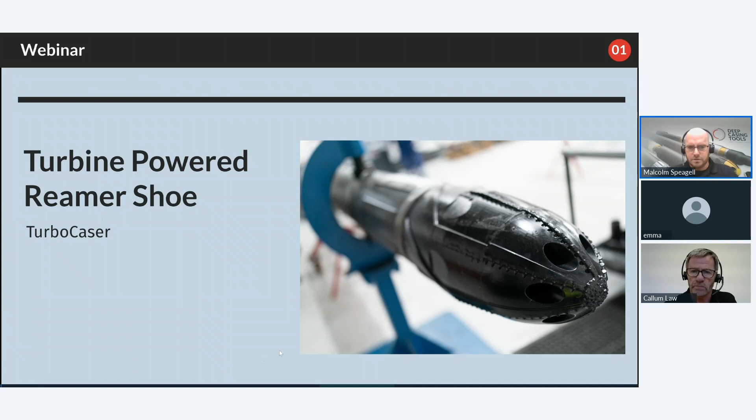Welcome to the webinar concerning the TurboCaser technology from Deep Casing Tools. We have two types of turbine reamer here: the Turbo Runner, which is a final string non-drillable reamer shoe, and the TurboCaser, which is the subject of today's webinar.

As you can see from the drawing on screen, it's very similar to a conventional piece of casing shoe equipment from the outside, but it has a special reamer shoe on the end, a high-speed, low-torque reamer, purely hydraulically activated by pumping fluid through while running into the hole. This technology is used to remove any obstructions that might be in the annulus while you're running your casing.

The TurboCaser, as mentioned, you can drill through once you've got it into position. Starting from right to left in this picture, we have the casing liner connection - we can make any kind of connection to any kind of casing you might need before we send out the tool to the rig site. From there we go to the fail-safe rupture disc and bypass system, which I'll show more about in the next slide's cross-section.

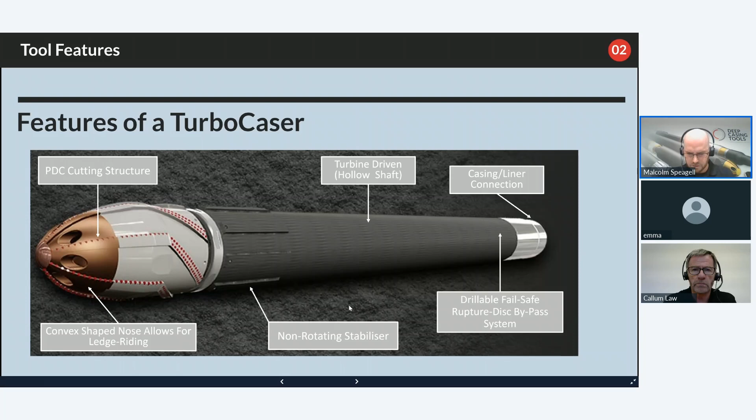Oh, that's the wrong one. Why is it done that? Sorry, I've gone to the wrong slide.

Here we have the cross-section of the TurboCaser showing the flow path from left to right through the tool. We start with fluid coming in through the top sub. Normally around this area we have a filter which filters out any extraneous materials from the mud. In the past we've had experience with some very strange items caught up in the mud system, such as tie wraps or electrical cables - these will be filtered out at this point.

The burst disc assembly itself is there for safety. If you have a blockage of any kind, it will be activated by pressure differential, causing the burst disc to rupture. In this case, the fluid flow will then go straight through the main hollow shaft of the runner. So you would lose the ability to rotate, but you'd still have a flow path in the worst case scenario.

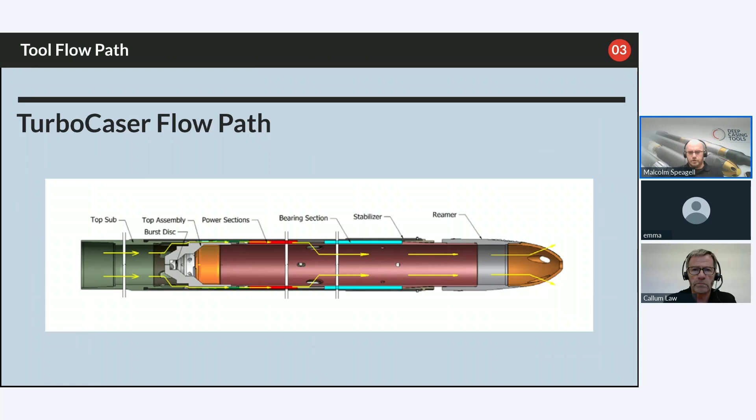So the times you would use a turbine reamer, as mentioned, are if you have any cuttings beds or issues with hole cleaning left behind from the drilling runs, or you have hole fill at the bottom of the hole. You can use the reamer to agitate the cuttings and help you move past those and hopefully get them out of hole. If you have any ledges in your annulus caused by hard formations or swelling shales or things like that, it would also help to get past or remove those from the annulus.

It can help to smooth out micro doglegs caused by directional BHAs or any deflections that might have occurred while drilling. It can also be used to remove excessive mud filter cake from the sides of the annulus, which will help to ease the passage of the casing down.

It's especially good in undergauge sections. As mentioned, you might have some swellable shales, or you might have formation creep or something in certain sections that cause a bit of a squeeze on the annulus. Again, using the reamer here can just help to smooth the transition of the casing down.

And we're also looking at removing the necessity for excessive hole cleaning. Obviously, we know it takes a lot of time and money to be able to perform extensive hole cleaning or under reaming or hole opening at the end of sections or during drilling, and using these turbine reamer tools can help to remove that from the operational sequence.

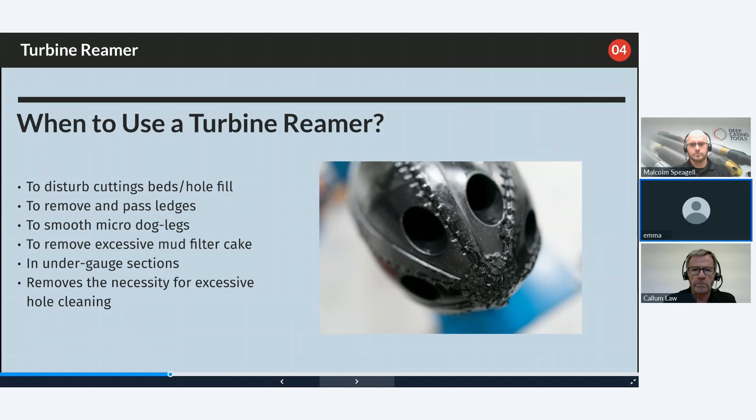So yeah, this particular slide now goes on to describe a little bit about the well in question here that we have. This is the plan and the vertical view. You can see on the right hand graph the well profile, the vertical view, and it's also showing the formation tops of the specific formations, some of which here in the Middle East are quite challenging, to say the least.

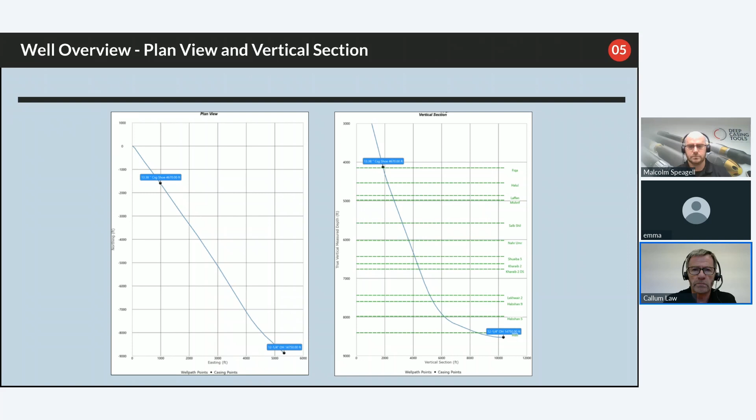So you can see at the end of the section there that it goes into horizontal. This is the schematic from this particular well. You can see it departs the 13 3/8, I think around about 4,600 feet, and has a section TD of 14,900 feet. So all in all, a 12.25 section of 10,200 feet, which is quite a step out for a 12.25, quite a distance for a 12.25 section.

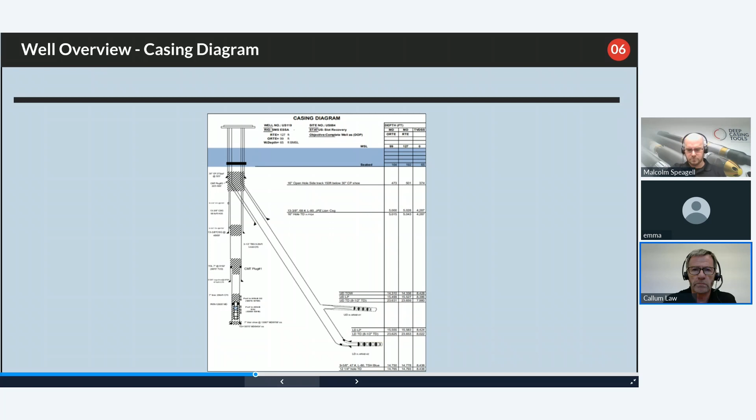On the next slide, we have the challenges, basically, with these various challenging formations in the Middle East here. While they were drilling the 12.25 section, they got stuck 3 times, so had to pull back and sidetrack all 3 times, and then eventually sidetracked on the 4th one successfully, pulled out of the hole and ran the 12.25, the 9 5/8 casing. So each time, you can see the Mishrif and Salabi, particularly the Nahr Umr, were quite challenging formations to drill through.

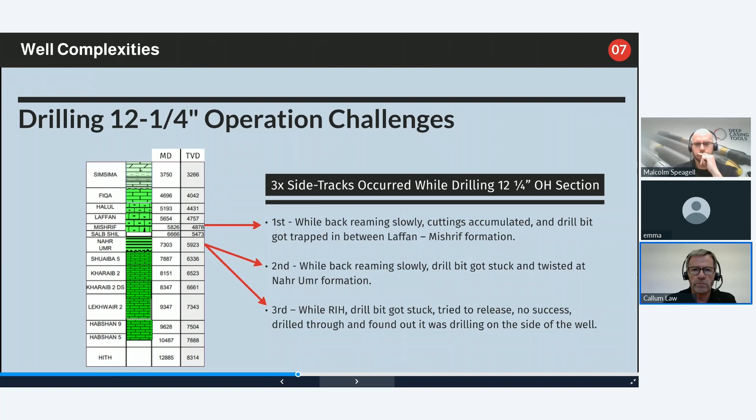So with all that various data and information that we got from the well and from the client, what we do is make a job preparation. In other words, we try to simulate the hydraulics running of the tool with the hydraulics calculation. We use software from Merlin TDH.

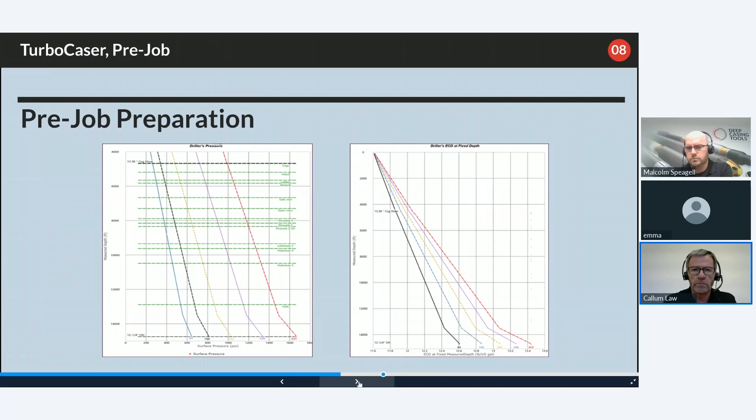We would normally download this and give it to the drilling engineer and team, and they would then give it to the offshore team to have by their side as a reference.

These PDCs are very small, and the shape of the nose is bullet shaped, so it allows for riding over ledges, but predominantly it's designed so that it will not drill a new hole. It doesn't have enough torque, and the shape of the tool along with the small PDCs is non-aggressive, so it will not drill new hole.

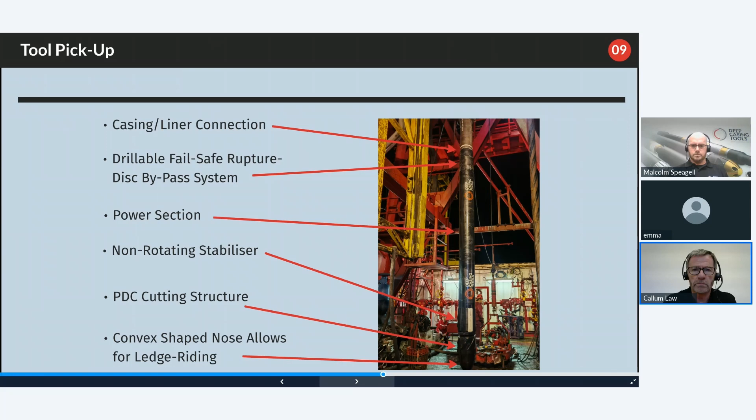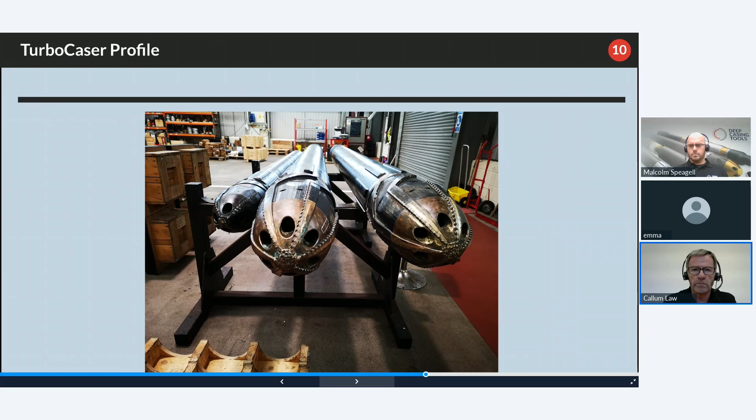Next slide then. So before we do anything, once we build the tools here in Aberdeen, we flow test them to make sure every component is working as it should, with no restrictions or issues with the tool. This shows you an example of what it looks like when it's actually flowing.

So when we do a surface function test on the rig site, this is basically what you would see when you look down into the bell nipple or down into the hole. You would have the tool nose just below the rotary table, so you can actually see and visually quantify that the tool is rotating and flowing as it should. You can see there's about 10% or 15% of the fluid that starts to come out between the reamer and the bottom of the stabilizer.

This is basically to alleviate any buildup of cuttings in that area, to lubricate it and push out any cuttings that have built up. As a result, when we go at high speed, you can see that centripetal force is just pushing the fluid out in a circular umbrella motion.

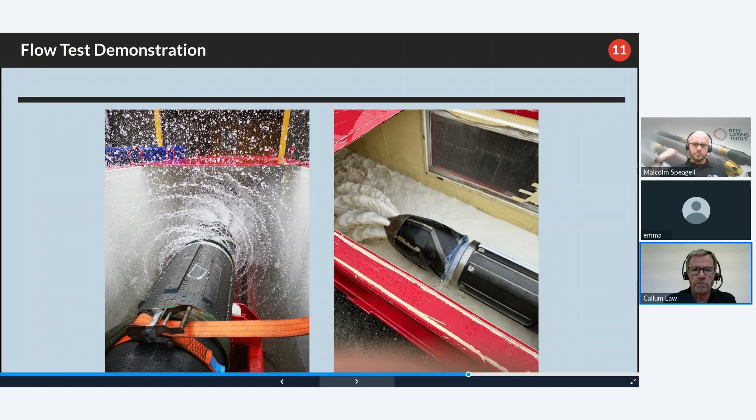Then we pick up the third one and start in the hole, and that's where we find the first restriction, the first slack off. We slacked off a fixed limit, which was normally about 20 to 30,000 pounds of force.

It wouldn't go down, so we try again, it wouldn't go down. So then we pick up and kick in the pumps. In this particular case, we're pumping at 5 barrels per minute, and as you can see, very slowly we're slacking off and slacking off. Eventually slacked off, I think, up to about 20,000 pounds, and reaming at the same time. The pressure fluctuating shows that the effective reaming is based on the slack off weights.

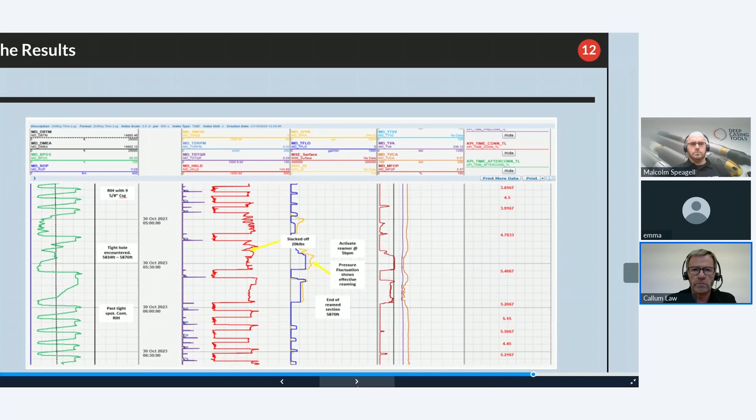So on this next slide is basically showing the resultant, proving the point of how the tool works, and the fact that it works opposite to a PDM or an RSS. With a PDM, if you stall it, you get a pressure spike on surface. With the turbines, you stall a tool and you get a pressure drop.

So when you're reaming, you get resistance on the nose, which slows the turbine down a little bit more, so you get more fluid through, and the pressure drops on surface slightly. So this yellow line in the graph is actually showing the standpipe pressure decreasing as we slack off and hit the restriction, shown on the red line on the left.

So as we're slacking off continuously, the pressure decreases and we're getting quite a stable pressure on surface, and we'll keep reaming all the way. It proves that when we do pick up the string, the pressure increases back to where it was before. So that's just a great indication of how the tool actually works downhole.